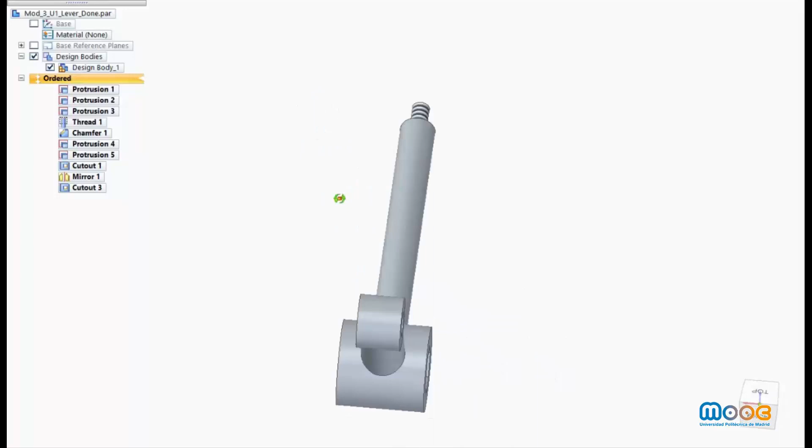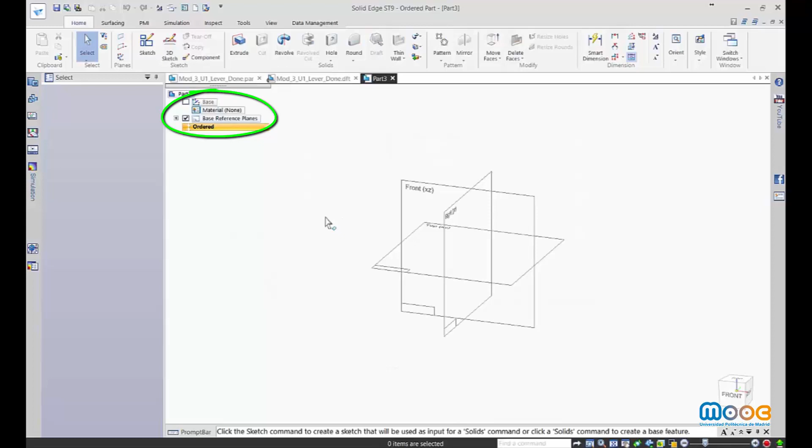Welcome to Module 3, Unit 1, where we are going to model some common parts, and we are going to begin with this lever. Well, first we are going to start with a new part file. We have the base that we are not going to use. We have base reference planes, and we are going to begin to model the lever.

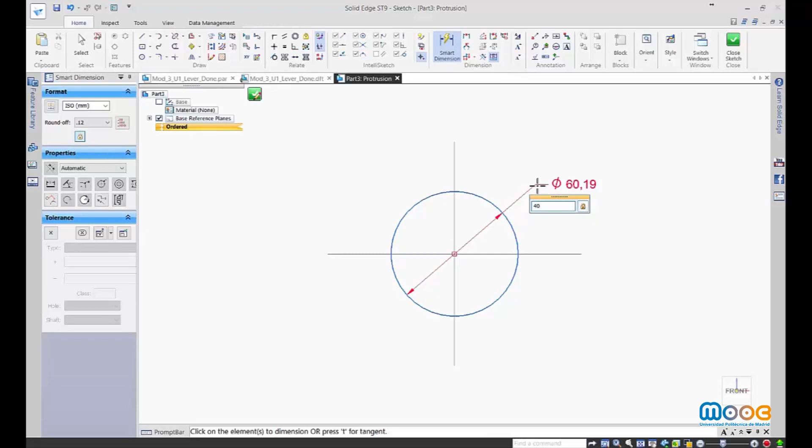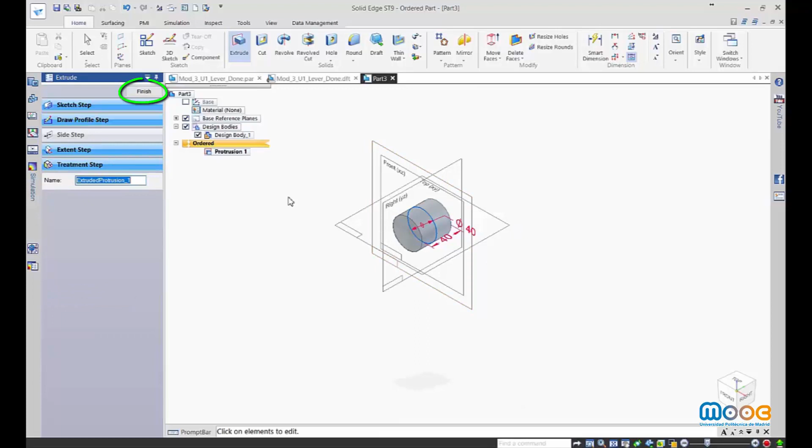The first primitive, the first geometry, is the central cylinder. We are going to make it through an extrusion in the front plane, extrusion of a circle with a diameter of 40 millimeters. In this case, we are going to prefer a symmetric extension. The point of view is not very adequate. We can check it, or we can select the isometric point of view. We are going to give the cylinder 40 millimeters too. Well, we finish the operation and we save the file with a convenient name.

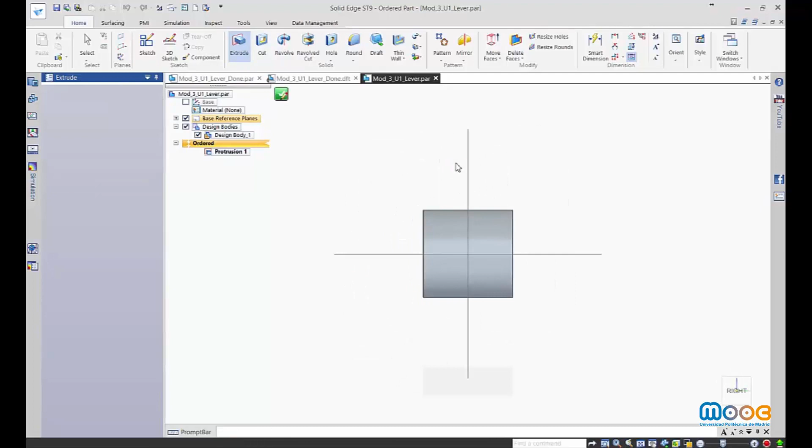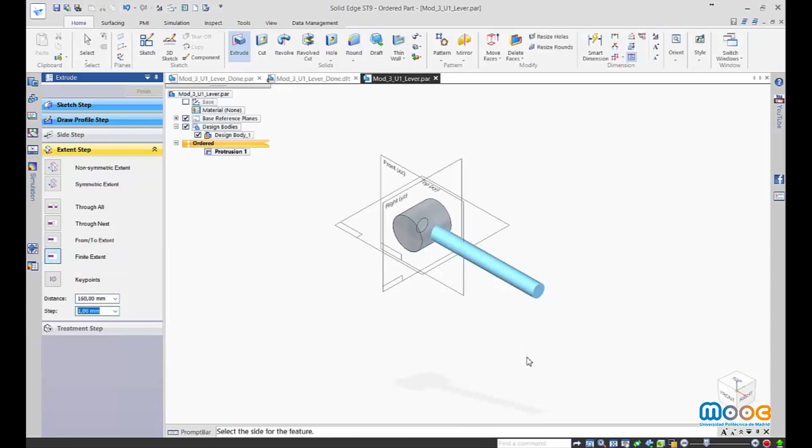The second step for our lever is to make one of the arms of the lever. We are going to use extrusion too, but in this case with the right plane as the basis of the extrusion. The profile we are going to sketch is a simple circle with a diameter of 16 millimeters. Now we can use non-symmetric extension, only one extension up to 160 millimeters. We finish the operation and we save the file.

The next step we are going to do is the inclined arm. To do that, we need first an inclined plane. We select new plane, angled plane, and we follow the instruction that we have in the bottom line: click on a planar face or reference. In this case, we are going to use the right plane.

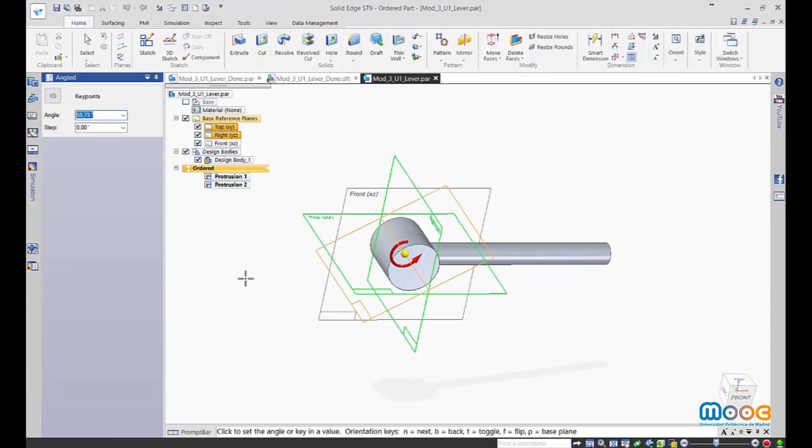The next step is to click on one plane that is going to play the role of basis of axis of rotation of our new plane. In this case, the top plane, and we have already the inclined plane. We are going to set the inclination of the plane to 60 degrees in this sense. After this, we are going to make an extrusion, selecting this plane.

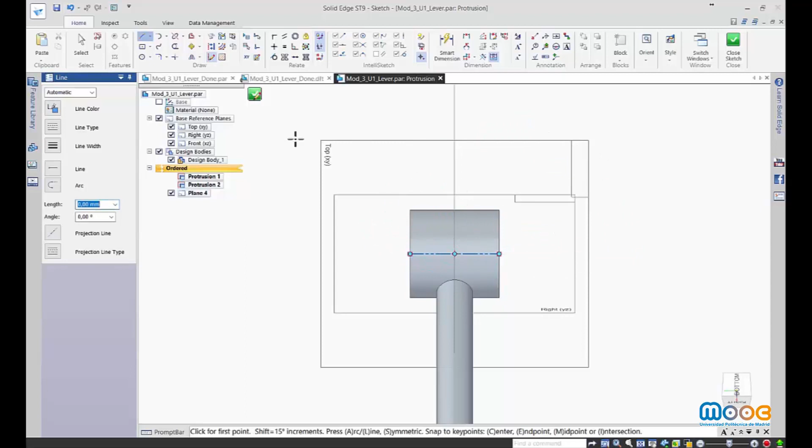Well, what we need now is to produce a new cylinder in the exact center of the basis cylinder, of this cylinder. The question is, we don't have a clear central point in the figure yet. So we are going to draw a construction line from the middle point of one side to the middle point of the other side. With this new line, we have a central point as reference for our circle.

We have to switch off construction mode. We select the circle tool. The dimension of the cylinder is 20 millimeters of diameter, and the length is 70 millimeters.

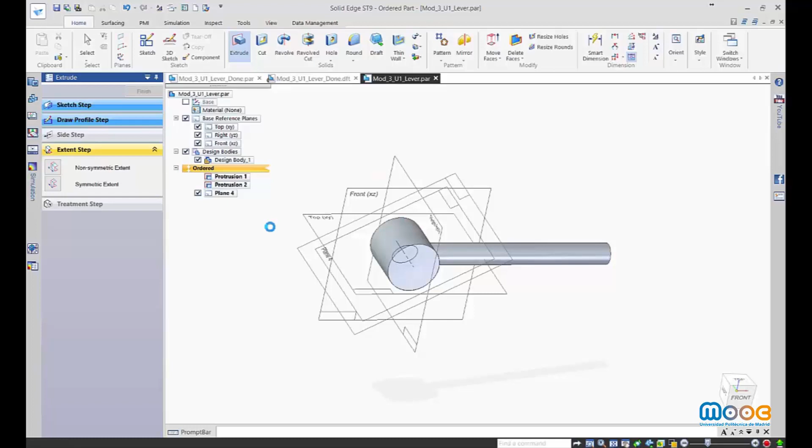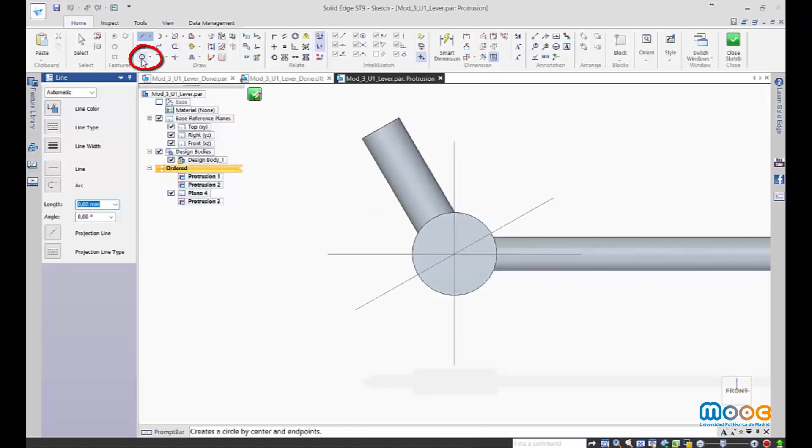The following geometric feature we are going to model is the small cylinder at the end of the inclined arm. It's also an extrusion with the front plane as a sketch basis plane. We draw a circle just in the middle of the external inclined arm, and we set the circle with a dimension of 25 millimeters. Close the sketch, and we have to return to the symmetric extension to give the symmetric total length of 20 millimeters. Well, we finish and save.

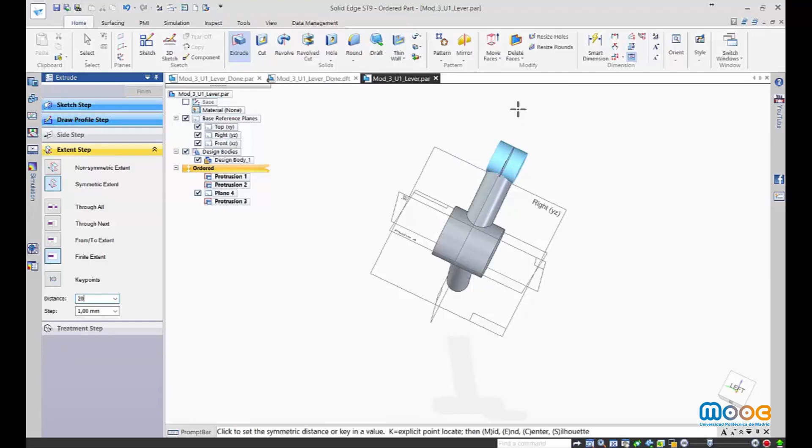In this first video, we are going to make all the solid volumes that form the part. In the next video, we are going to make the hollows and special operations to the part. The only volume we need is the small cylinder, which is going to support the thread of the lever. It's an extrusion in the final plane of the arm.

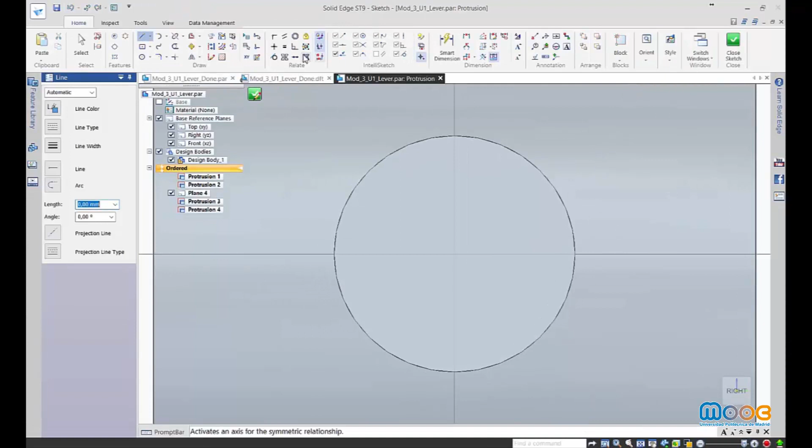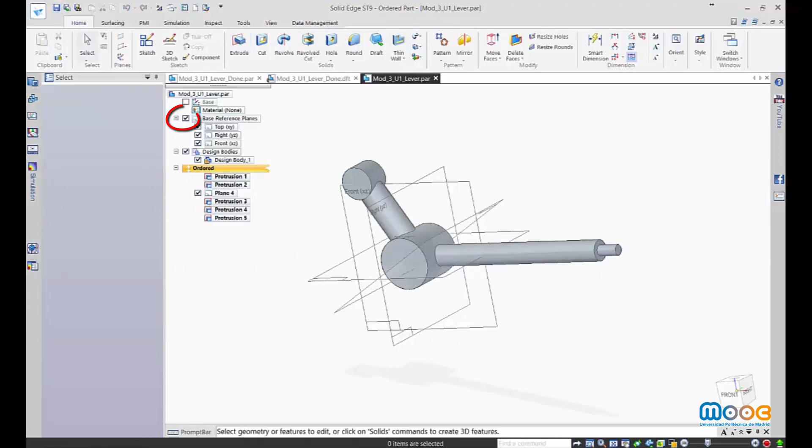We choose the circle tool, concentric with the circular section of our horizontal arm. We set a diameter of 8 millimeters and non-symmetric extension, a length of 16 millimeters. Finish and save. We switch off the view of the planes and set the perspective to obtain a more realistic view of the part. Okay.

In the next video, we are going to finish the part, making the holes and special operations.